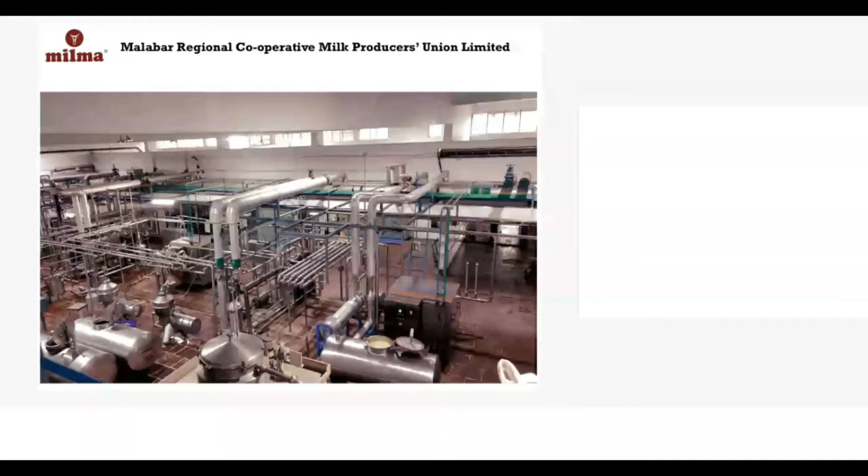This is the general view of a typical dairy. Presently, this is Calicut dairy with a processing capacity of 2 lakh liters per day, along with the other products. This is general information with respect to Malabar Milk Union. Malabar Milk Union started in 1991. It's a 1,200 crore company having 1,000 plus milk dairy cooperatives as affiliated members, and major dairies in 5 districts, and 1 dairy is under construction in Malappuram district.

We have 4 milk chilling plants and bulk milk coolers in village cooperatives, with capacity varying from 1 KL to 5 KL. We have 1 exclusive products dairy at North Beypore and an exclusive human resource development training center at North Beypore. For decentralized marketing, we have marketing depots at 8 centers under the dairies, as well as 1 ice cream plant attached to Kozhikode Dairy in Kunnamangalam. To support the farmers, we have a straw baling unit as well as a TMR plant. TMR means total mixed ration plant, as an alternate feed to cattle.

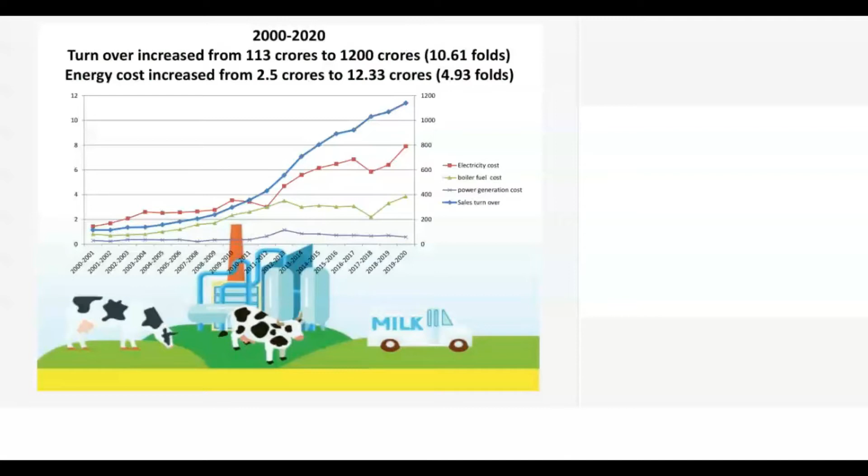For the past 2 decades, our turnover increased from 113 crores to 1,200 crores. That is almost 10 times. But our energy cost increased from 2.5 crores to 12.33 crores. That is below 5-fold. It's a clear indication of the energy conservation practices followed by MRCMPU for the last many years.

To add on that slide, our energy consumption was earlier 2.21% of total revenue. It is reduced to 1.03%. One reason is that the major quantity of our milk procured from village level cooperatives is chilled at the source itself, at village level, and transported to dairies, and in net effect, we are reducing the transportation cost as well.

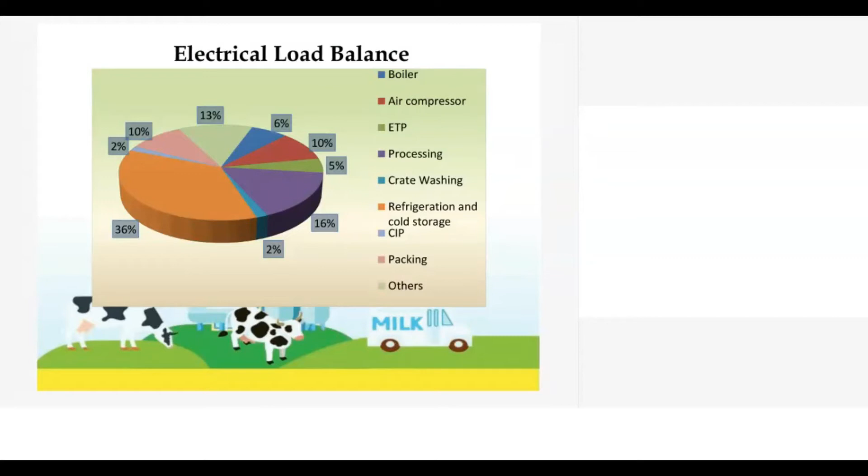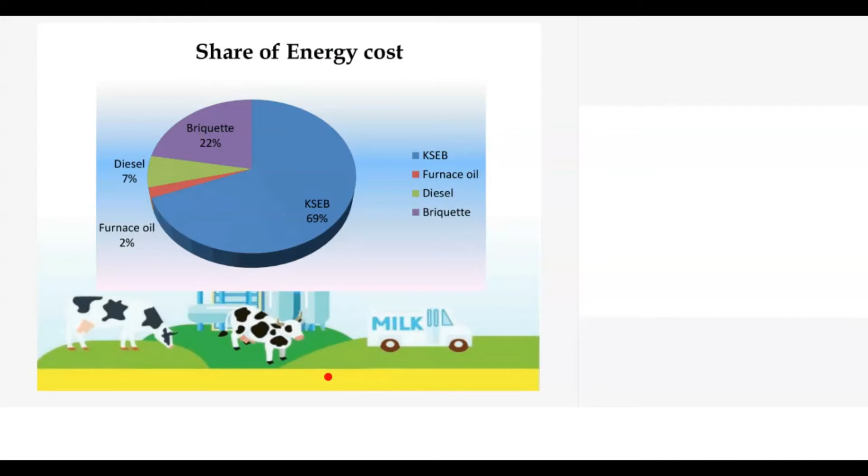Coming to cost of energy, the main energy is electrical power, which accounts for 69% of the total energy cost, followed by 22% for thermal energy, that is briquette, since all our boilers are biofuel fueled boilers. Diesel, for self-generating power, accounts for 7%. Of course, we have one or two furnace oil fired boilers as emergency standby. It accounts for 2% of total energy cost.

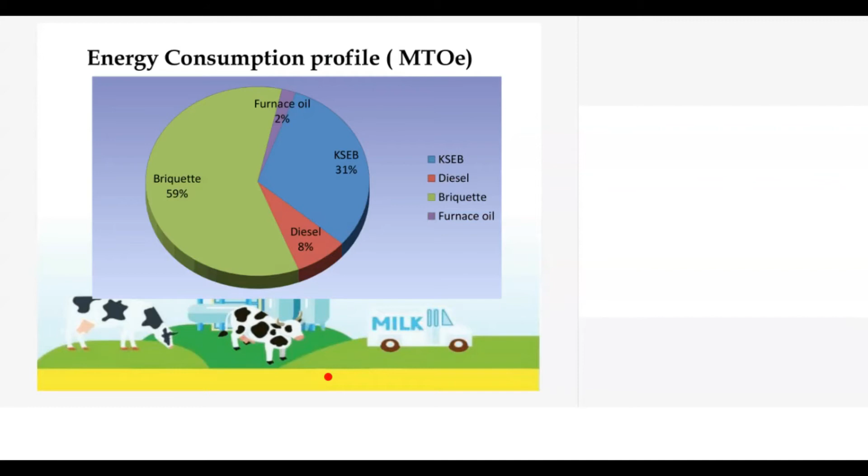Converting that energy consumption profile to a common platform, that is metric ton of oil equivalent: furnace oil, as already stated, is 2%. Electric power is 31% of metric ton of oil equivalent. Briquette, the major chunk of our boilers running on briquette, that is firewood waste and agricultural waste, accounts for 59% of the total. And diesel, used for self-generation of power in case of KSEB power failure, accounts for 8% of the total metric ton oil equivalent.

Then coming to real energy conservation practices, I have classified them into thermal, electrical and non-conventional. Coming to thermal, as we have stated, 36% of energy used in the dairy industry is consumed by the refrigeration systems. There, much heat energy is dissipated to the atmosphere, so we have installed desuperheaters in ammonia refrigeration plants. Our total capacity is 700 TR of desuperheaters. That is recovery of waste heat, which otherwise would be dissipated to the atmosphere by atmospheric condensers.

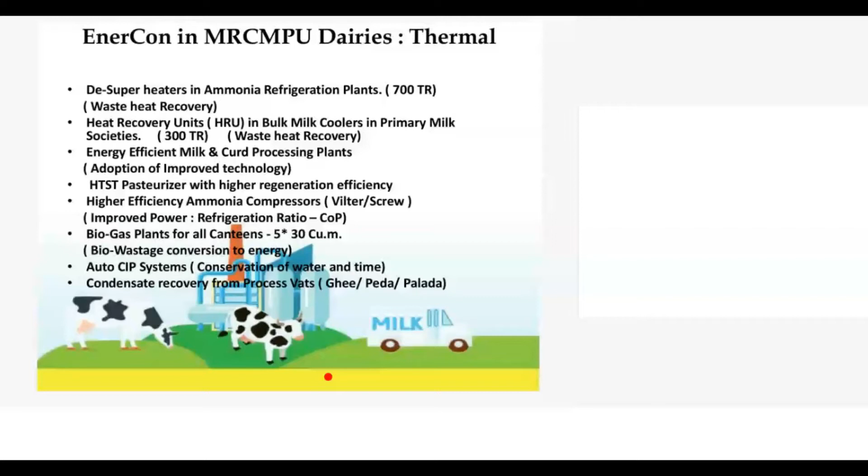Then condensate recovery from process vats, that is for the ghee manufactured in our plants, or peda and palada, which all come under the batch process scheme. All the condensate from the steam jackets is completely recovered and treated as boiler feed water.

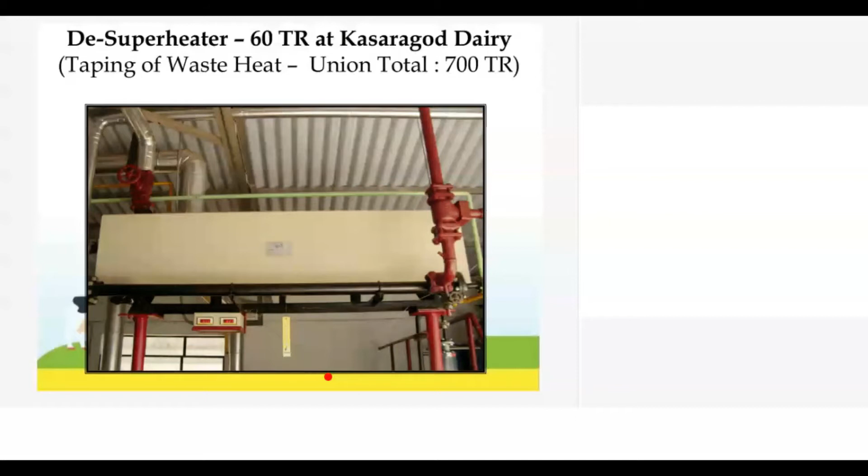Then expanding on this thermal conservation, coming to desuperheaters, in 2004 we installed one desuperheater at Kasaragod dairy as a prototype, and by its success story we have installed similar 6-7 pieces, and now at present the Union has a total of 700 TR of desuperheaters in all dairies. Coming to the curd plant regeneration, we have 3-stage regeneration in curd plants, and we have 6 plants of 5 kLph each across dairies.

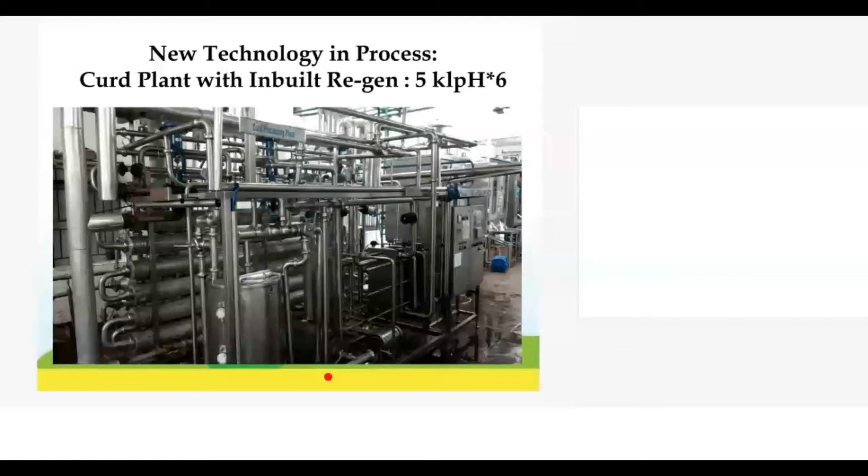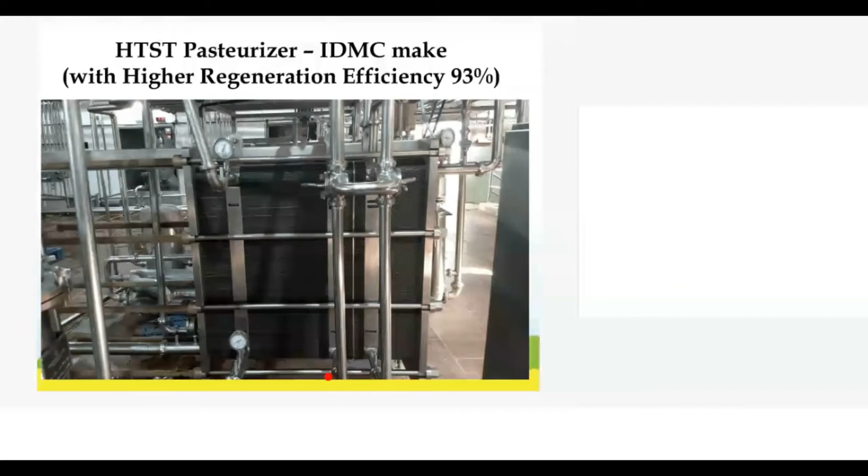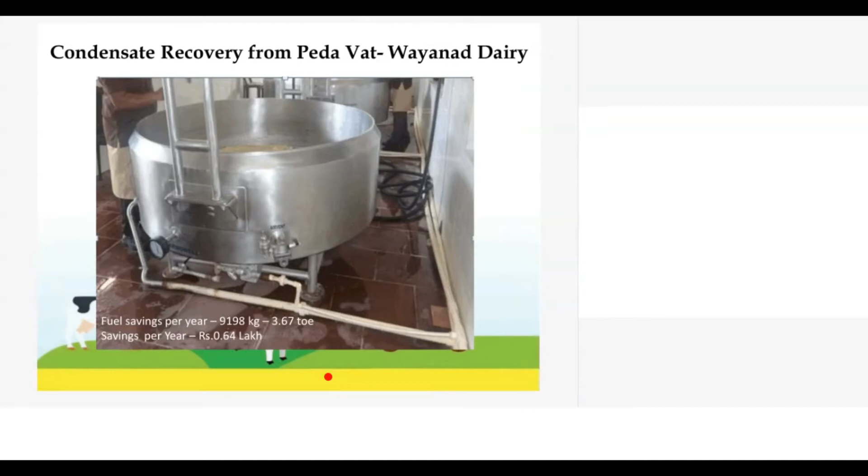Coming to higher regeneration efficiency, milk pasteurization plants have 93% regeneration efficiency; we have various makes of pasteurizers, IDMC, Tetra Pak or Repute. Then for ammonia compressors, we are using screw compressors as well as V-shaped compressors, that is multi-cylinder high-speed compressors, in the refrigeration. Coming to condensate recovery, all our batch process vats are fitted with condensate recovery systems.

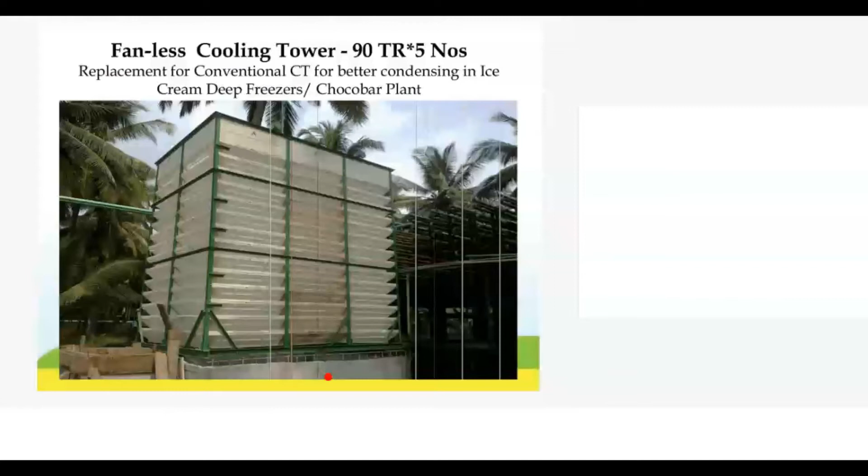Then coming to electrical, from 2000 onwards we have installed automatic power factor correction, APFC, capacitors in all units. Our power factor ranges from 0.99 to unity in all units across the year. And VFD controls are used in induced draft fans as well as in pumps and chilled water condensers. We are using optimization by automation through VFD in all high capacity motors.

Then coming to illumination, our latest dairy, Malayora dairy in Sreekandapuram, has 100% LED lighting. It is one of the first in India itself. And in a phased manner, we are changing CFL as well as metal halide lamps to LED on a replacement basis.

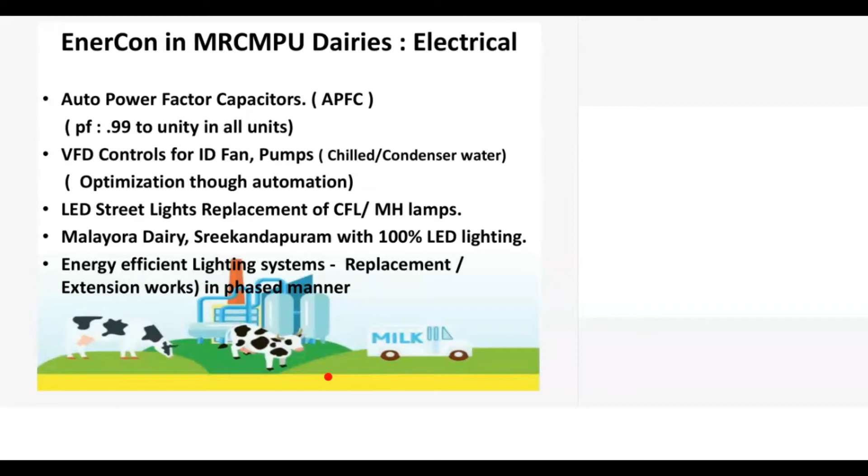That is real photos of APFC. Then VFD controlled chill water system, VFD in ID fan, in boilers, LED system, 100% LED in Malayora dairy. It is also a 1 lakh liter capacity dairy in Kannur district.

Then coming to non-conventional energy, usage of non-conventional energy. In each and every plant we have solar water heaters, since dairies are using much hot water for cleaning of utensils, trays, cans, etc. And we have one 30 kWp grid connected solar plant in Calicut dairy, and all the offices are having small capacity, that is 3 kWp, 8 numbers in all offices. Grid connected solar plants are connected in village level APCOs as well.

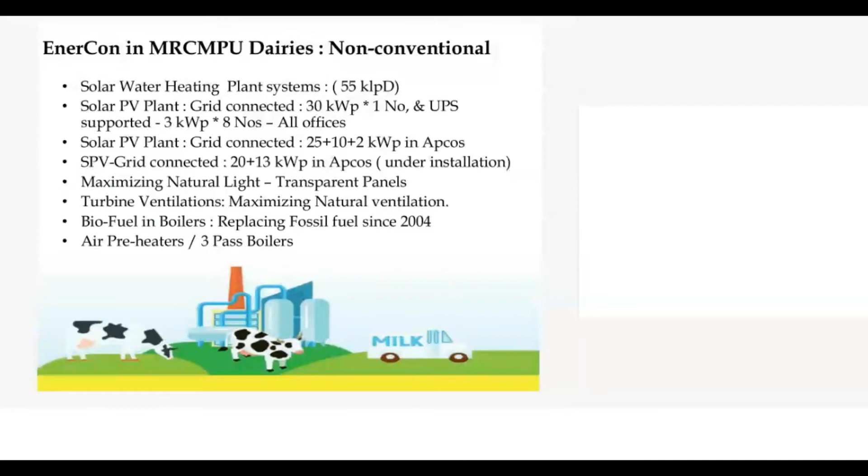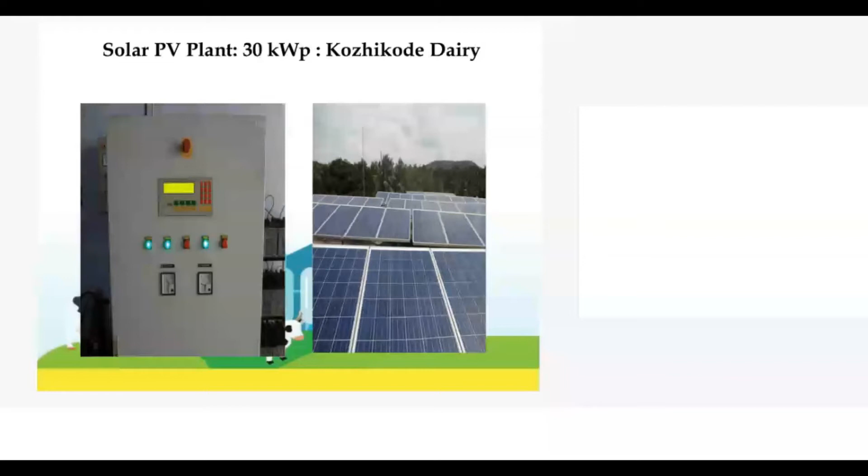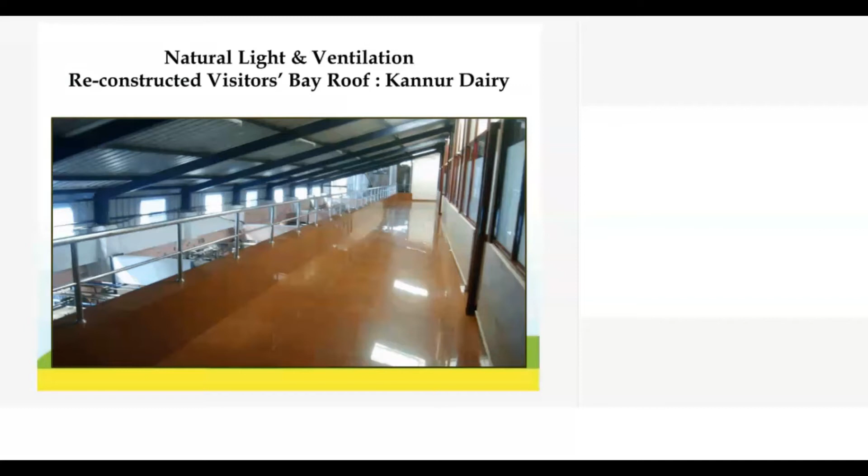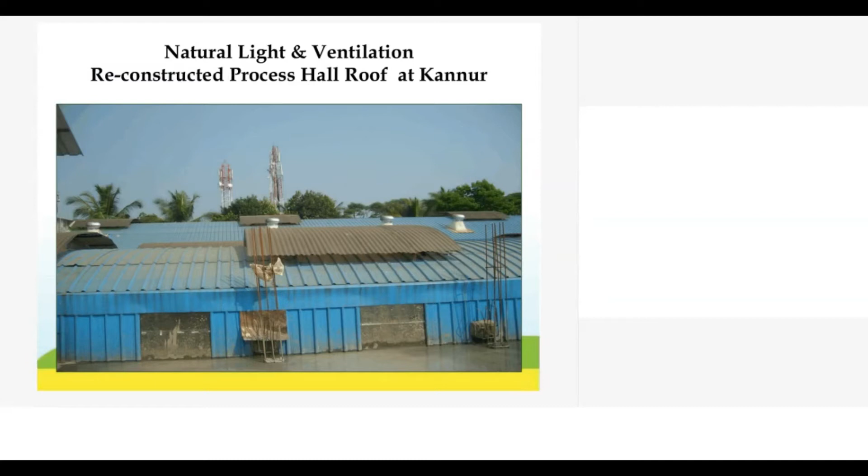Next follows photos of the 30 kWp solar PV in Calicut dairy. Then natural light and ventilation in Kannur dairy, that is, you are seeing the visitors bay in Kannur dairy. The visitors may not enter the dairy plant, and they can view the entire dairy plant through the visitors bay, and the entire dairy plant is with natural light. And LED street lighting in replacement of CFL and MH lamps across all dairies.

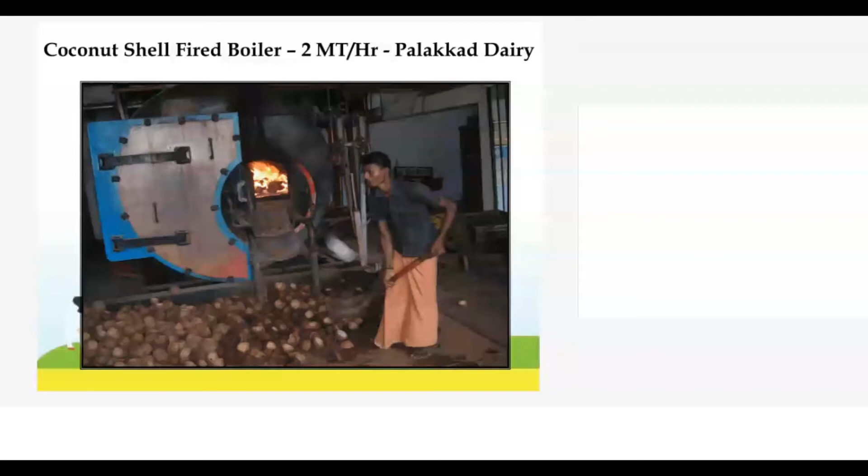Then coconut shell or bio briquettes. Bio briquettes are used in all dairies. And then electric vehicles for transportation of goods and packing materials inside the campus, from the godown to the process area. We are using electric vehicles; last year we purchased one in Wayanad dairy, and we have 5 more in other dairies.

Then we are empowering our primary cooperative societies also for non-conventional energies. Earlier, solar water heating systems were used, but we have converted many of them to HRU, that is heat recovery units, across the APCOs. Coming to solar PV grid connected, already we have one at Kasaragod, that is Balanthode APCOs, another one in Calicut in Maikav APCOs, and 2 are under construction in Wayanad, one at Meenangady and one at Thenery.

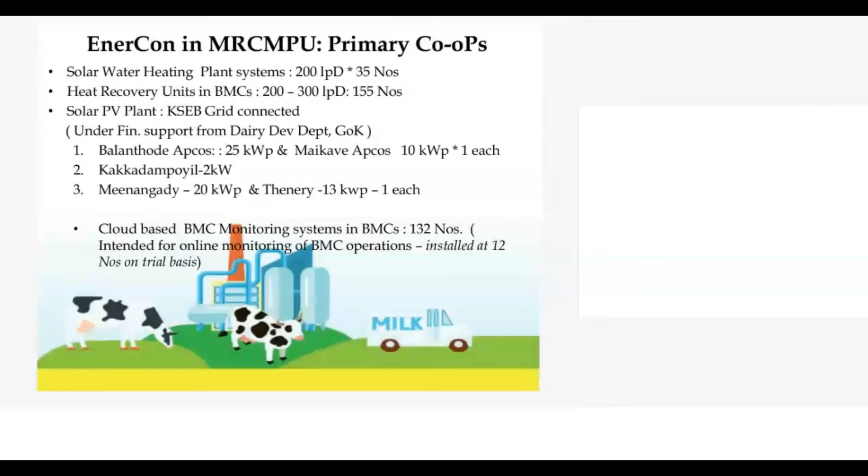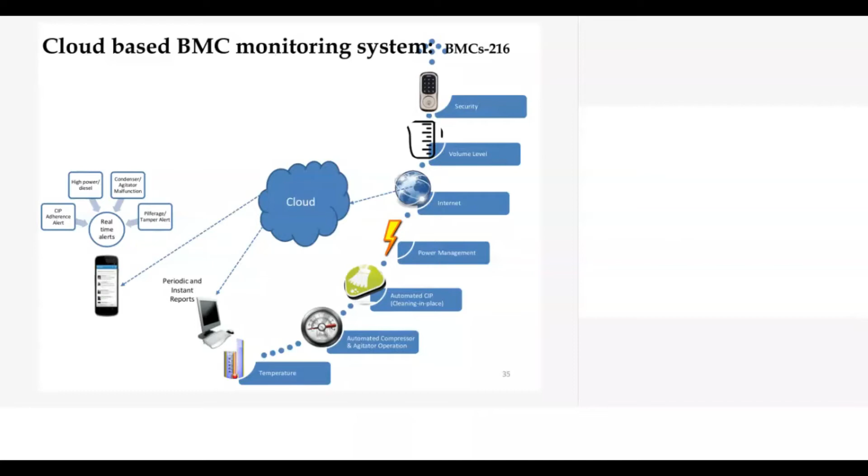Yes. For monitoring the energy consumption as well as the quality at APCOs level, we have cloud-based BMC monitoring systems, that is, operation of the refrigeration compressor for cooling milk in primary cooperative societies can be monitored from our office itself through cloud-based software, and we have 216 BMCs like that. By trial we have implemented 12 numbers across each and every district, and we are implementing all the BMCs in the cloud-based connecting system.

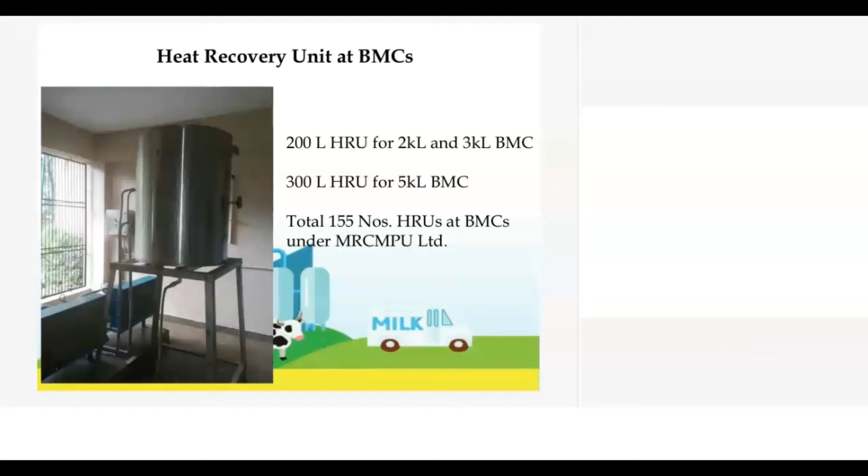Then, as rightly pointed out in earlier slides, heat recovery units in BMCs. Earlier, we were using solar water heating systems in BMCs. Many BMCs are situated in plantations, like rubber plantations, so shade becomes a major problem there. We have converted many of them to heat recovery units, that is waste heat recovery from BMC compressors. That is the stage.

Earlier, during 2000, electric geysers were used as a source for cleaning utensils and cans in the BMCs, and high 5 kW or so electric geysers were used. Due to high electric charges, we converted many of them to solar water heaters in a phased manner, and at present we have installed heat recovery units, that is desuperheaters, for the BMC compressors as well. It is sustainable and much eco-friendly.

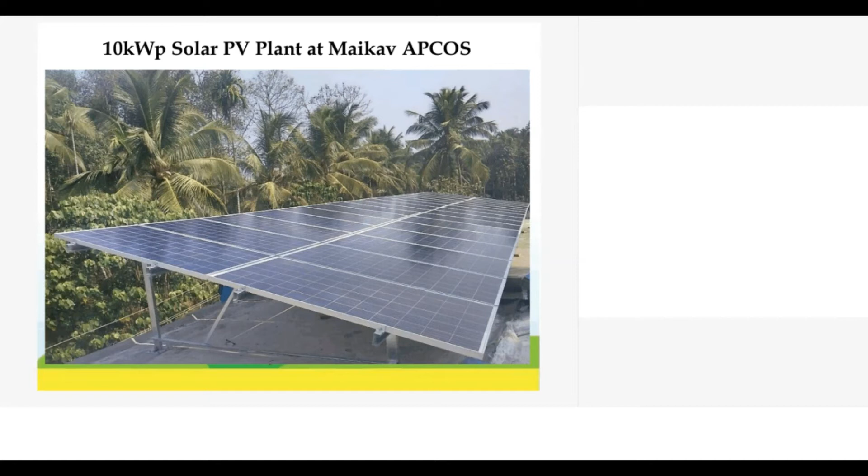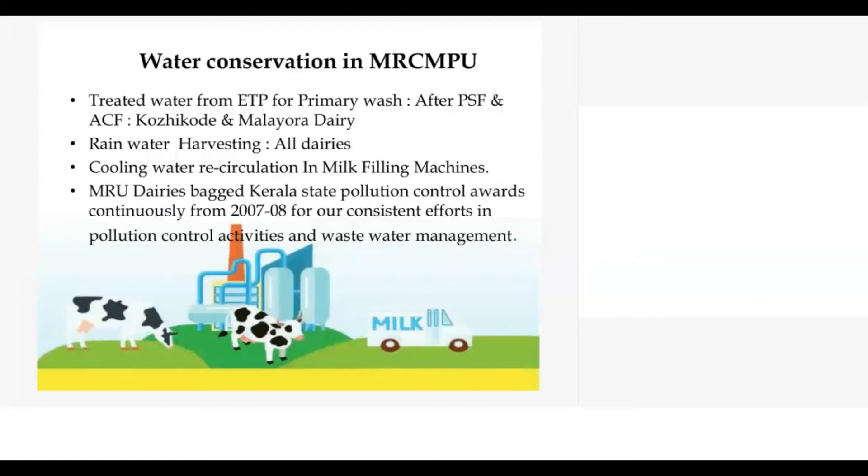Coming to water conservation. Water conservation is equally important since dairies are using almost 1:1 or 1:0.8 liter of water for each and every liter of milk processing. Treating water in the effluent treatment plant is also very important. In Calicut as well as in Malayora dairy, we are using treated water after pressure sand filter and activated carbon filter as primary wash water for trays, and rainwater harvesting is used in all dairies. Then cooling water recirculation in milk filling machines for water conservation, and we have bagged many awards from the Kerala State Pollution Control Board continuously from 2007 onwards till last year.

Then we can see the impact of reducing carbon footprints. When you use solar water heater or DC desuperheater for making hot water, there will be no emission at all. No carbon footprints, no emissions, no carbon.

Secondly, when we are using briquettes, that is biofuel, as boiler fuel, we will have some emission, almost 1.84 kg of CO2 per kg of briquettes or firewood used. That is reducing the fossil fuel and replacing it with bio briquettes.

When we are using furnace oil or diesel or any fossil fuel, 3.11 kg of CO2 will be emitted per kg of furnace oil. So when we convert our process from furnace oil to briquette or natural sources, the reduction of carbon dioxide, the carbon footprint, can be much reduced.

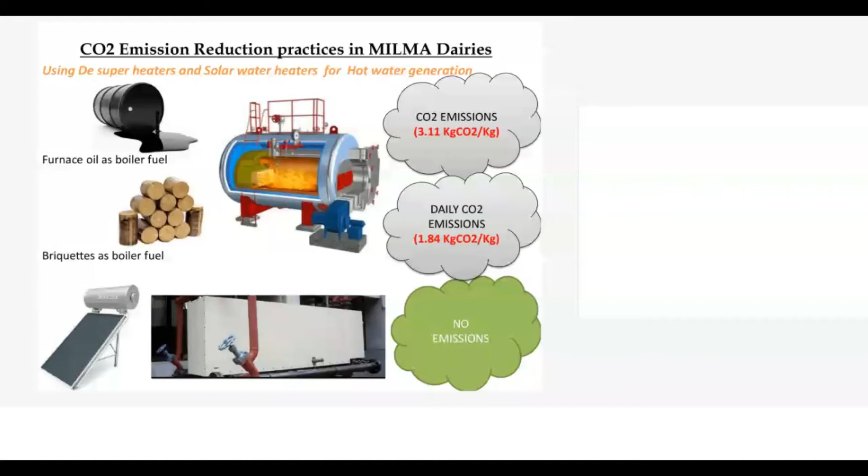That is only a calculation, equivalent saving of 98,000 kg of furnace oil per year for generating secondary hot water in our Calicut dairy. The furnace oil saving, 98 MT of furnace oil, emits 304,780 kg of CO2 while combustion. That is how we are reducing that carbon footprint.

Similarly, coming to briquettes, when we are using 230 ton of briquettes per year, that is 230 ton equivalent is 4,23,200 kg of CO2 while combustion.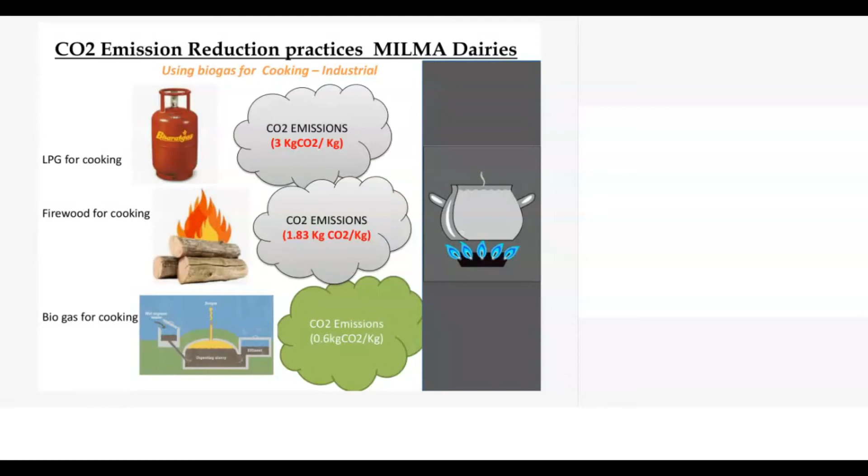Then when we are converting all our waste to biogas by biomethanization, we become more eco-friendly. That is our consumption: we are reducing the consumption of 3 LPG cylinders in a month.

The energy conservation practices that we have followed at present and for the last many years. The desuperheater, it is a theoretical approach.

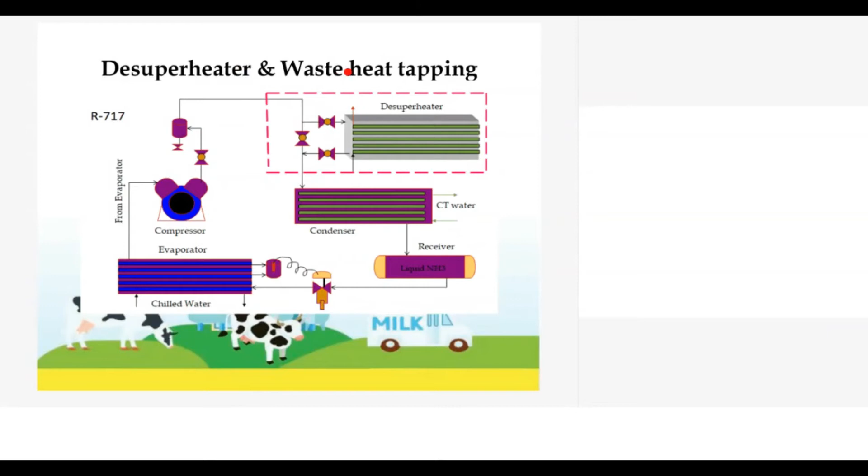Pointer. Sir, what happened, sir? No, just I am using the pointer. Okay, sir, I think everyone can see. Yes, we can use the pen also. The pointer, is it visible? Yes, sir, it is. We are pointing near the compressor. This is our ammonia compressor. The heat of compression, that high pressure, high temperature ammonia is passed. It's not working. Is it not working? Now it is visible, sir. You can see the desuperheater, yes, it is not moving.

That's all, yes, you can come to the compressor. From compressor discharge is high pressure, high temperature ammonia, which earlier was directly passed to the condenser. From the condenser it goes to the cooling tower. Cooling water comes from the cooling water tower and goes back, and the complete heat is rejected to the atmosphere, and the high pressure, normal temperature ammonia is received in the liquid receiver of the ammonia plant.

Then we inserted the desuperheater system. The complete high pressure, high temperature ammonia is passed to the desuperheater, where potable water is passed through the coils, and the entire heat from the ammonia, almost 60 degrees centigrade, is passed to the cooling water, and that water is used for our tray washing, can washing, and tanker washing purposes.

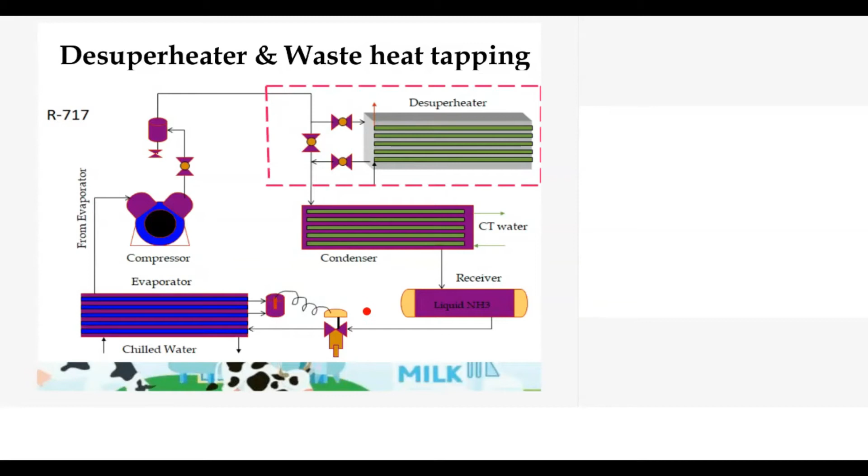That is the desuperheater. In our Malabar Union, all the dairies are fitted with the desuperheater, and we are getting almost 70% of our total hot water through this system.

That is almost a calculation of tapping waste heat from the ammonia discharge line using the desuperheater. We are getting 76 deg C of secondary hot water, used for our tray, can, or tanker cleaning systems. The investment is 12 lakhs, that is the desuperheater plus all the hot water connections with insulation and all.

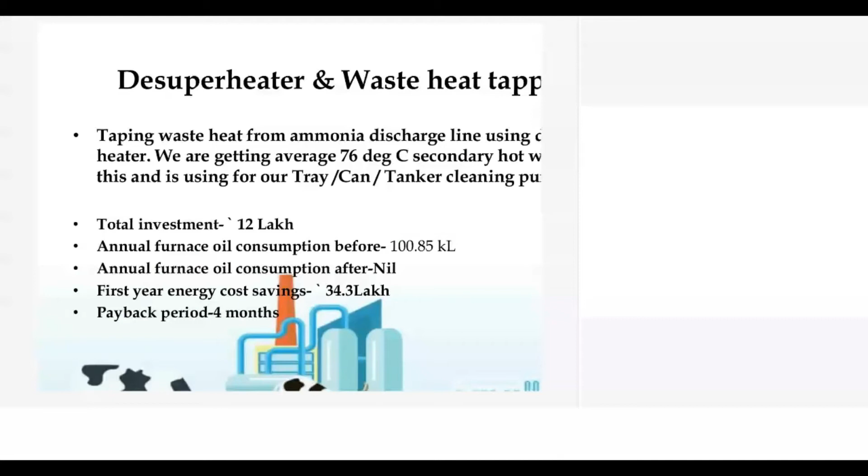Annual furnace oil consumption before was 100 KL, furnace oil equivalent, bringing it to a common denomination. Then, for that hot water requirement, we need not run the boiler for hot water generation. The simple payback period is less than 6 months, almost 4 months only.

Next, it is VFD based chill water. Another major consumption in dairy is chill water. Chill water, in the sense, we are using it for milk chilling, pasteurization, and other jacketed type processes, and ice cream plant also.

In this case, the chill water requirement round the clock will vary, from 10 KL to 150 KL. When we use the same pumping system for the entire 24 hours, it will be very expensive. So we introduced a VFD controlled 1.5 lakh liter per hour capacity chill water system.

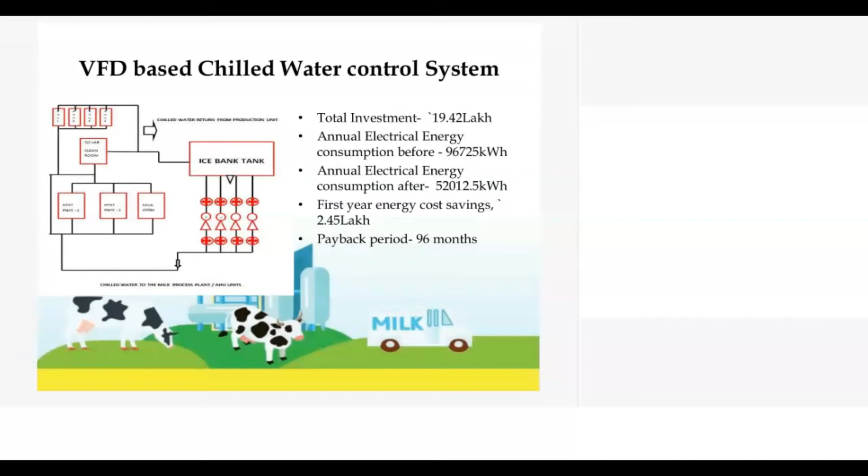In old system, the chill water circulation contains one 10 HP pump and one 15 HP pump. The 15 HP pump alone was used to get minimum flow, and combination with 15 HP and 10 HP you could get maximum flow. Then we replaced the system with 5 pumps of 7.5 HP each, and the minimum requirement is met with one 7.5 HP pump, and when we require maximum, we run 3 pumps. One 7.5 HP pump is coupled with the VFD, so the fractional adjustment and chill water requirement is met through the system.

It's a PLC based system, and the project was supported by EMC, Energy Management Center, both financially and technically.

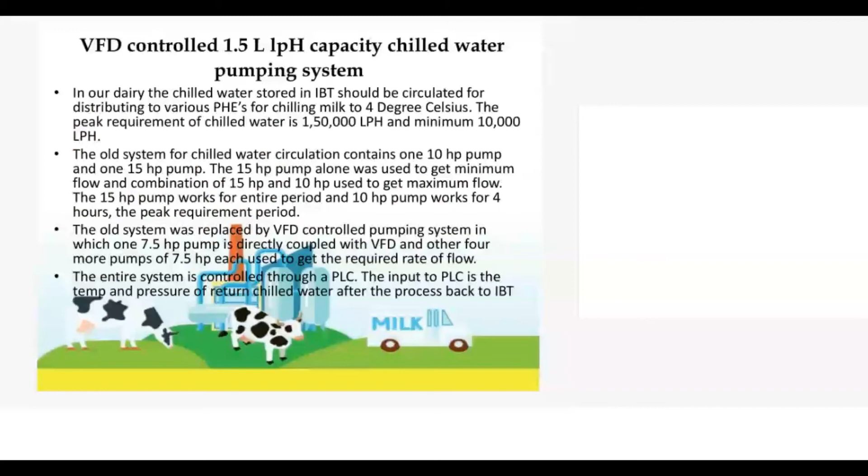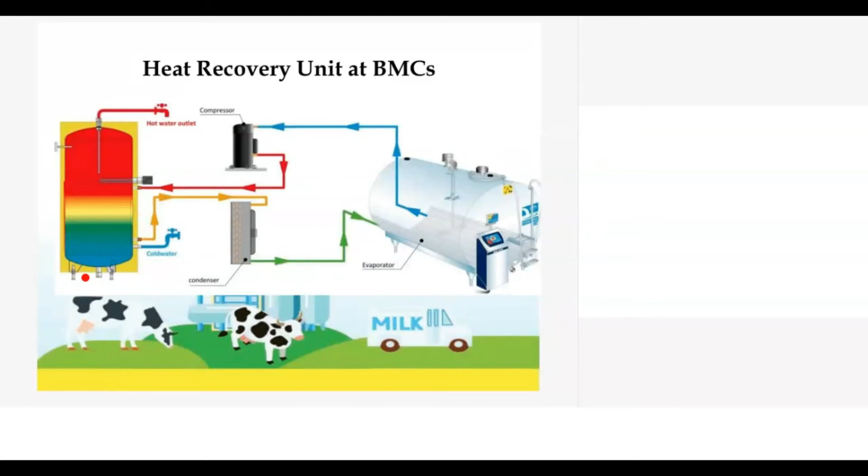In 2007 and 2008, we provided 2 kW or 3 kW, maximum 5 kW electric geysers, and all are replaced with heat recovery units. 300 liters of water at 60 to 70 degrees is available in the morning as well as evening for a 5 KL BMC. That is, we have eliminated the geyser and the entire hot water requirement is met this way.

It is very sensitive during winter, especially in Wayanad and high range areas. We are using this system, and village level people are very happy. Also, many village level cooperatives have small DG sets, so when there is power failure, the standby generator also gets overloaded. Such problems are also eliminated in this case.

We have already installed 155 HRUs, that is heat recovery units, in BMCs across MRCMPU.

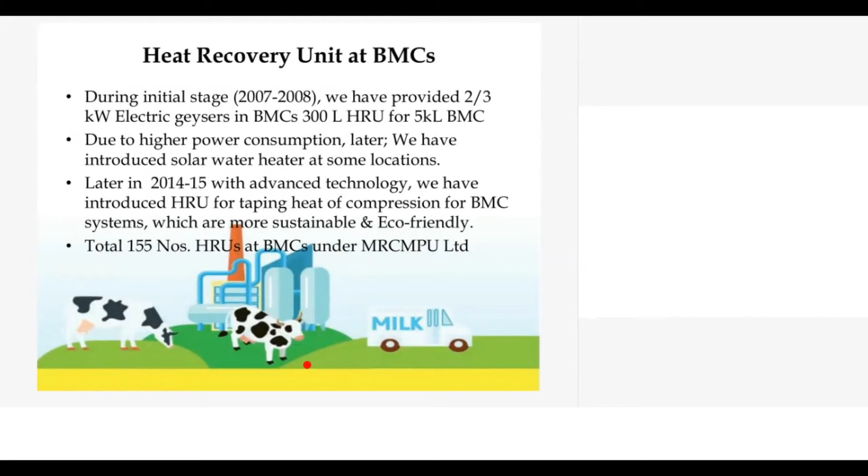Our employees are much contributing to the system. That is why, at the induction time itself, induction training to newly recruited staff covers energy conservation as one of the topics covered by the department head. We have an intensive training for all new recruits, for a 3 day program.

In that, the concerned discipline, procurement wing or production or marketing, is taught in detail, and secondly they are taught about HR and finance, as well as engineering and energy conservation practices followed by MILMA, that is Malabar Union. This way they get a culture of how to conserve energy and contribute to environmentally friendly working.

Also annual training with FSSAI, since we come under the food processing category. That is why we follow Food Safety and Standards Authority of India licensing protocols. Under ISO protocol, all our dairies are certified under 22000, and along with that we give energy conservation training in each and every batch.

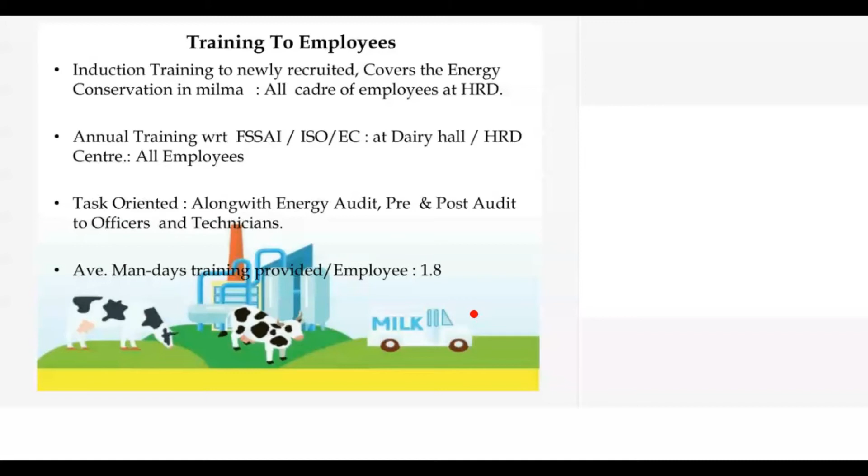I have not covered the milk powder plant conservation or condensing plant, since at present we are not running any of those plants. 2 plants are coming up, one condensing plant at 3 KLPH at Wayanad Dairy, and one milk powder plant proposed in our new premises at Malappuram.

During the last flood situation, we couldn't transfer much of our milk for conversion to other states because of roadblocks and other problems. Also during the COVID period, from last April-May, due to fear of COVID, many transporters hesitated to run tankers. That is why we proposed a milk powder plant to make us self-sustainable in milk powder production also.

That is why we proposed it, and it will be materialized during next year or so.